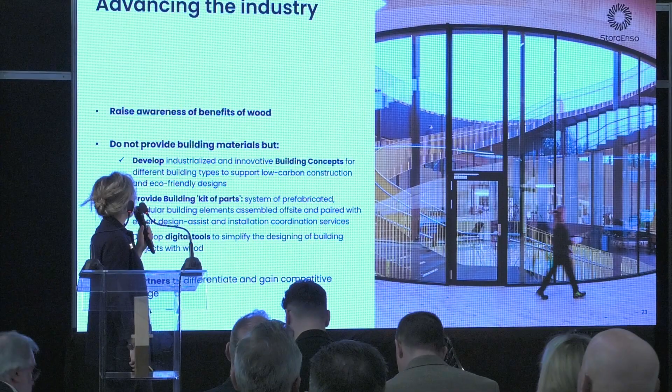So let's start from Wood Products Division. As Stora Enso, our goal is to be the leading provider of solutions for buildings in wood construction, and we want to raise the general awareness of the benefits of wood. We do not want just to sell material, but we want people to be aware of what wood construction means for the future. We do not just sell products, but we provide the building material, and we develop a building concept to give you a lot of information about how wood construction can be built.

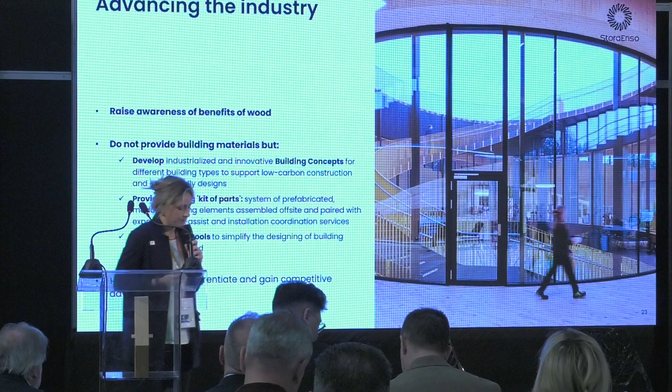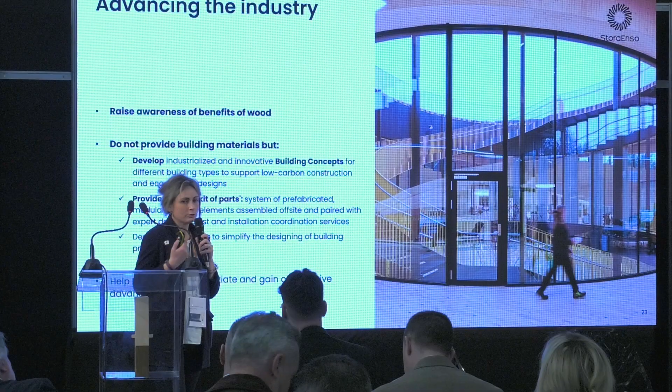We provide the building kit of parts, which I will show you later. And we develop digital tools, free, available from our website, that you can use to start designing with wood. Finally, we really want our partners to differentiate in the market, so we really would like to be close to our customers and our partners to let the market grow.

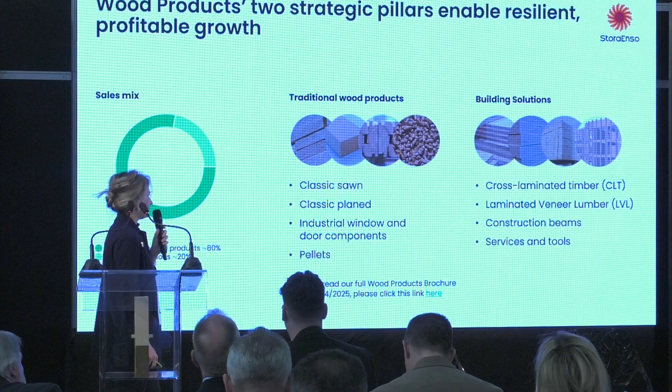In wood products at Stora Enso, we have two business lines, let's say. The biggest one is traditional wood products, so classic sawn, industrial wood, pellets, and so on. And then we have building solutions. I understand that Georgios already introduced you to the difference between classic sawn and engineered wood products. In building solutions, we deal with engineered wood products like CLT, LVL, glulam, and so on.

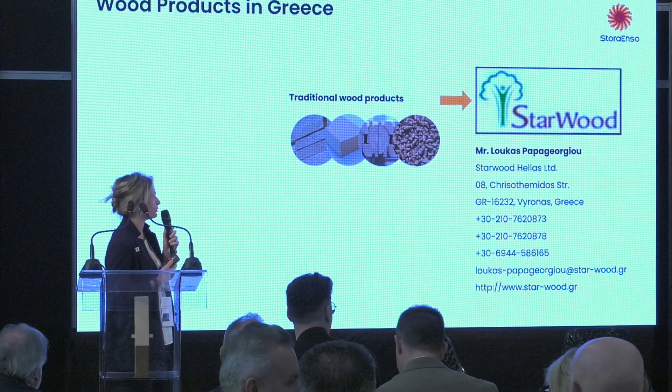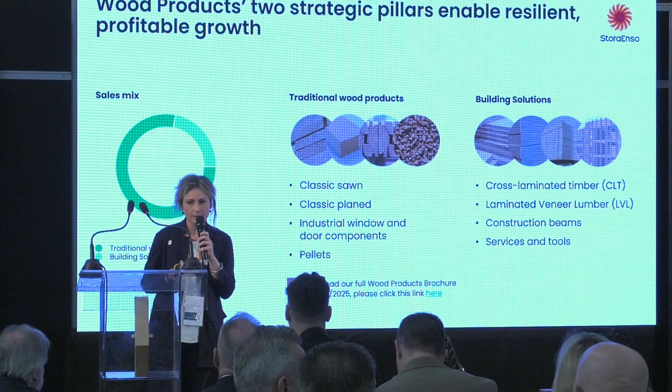When it comes to traditional wood products, in Greece we have an agent already, Starwood. I think Loukas is here, and I would like to thank Loukas for his job so far in this country. But when it comes to building solutions, we do not have an agent. We want to be directly close with our customers, and we want to have direct communication and a direct relationship with them.

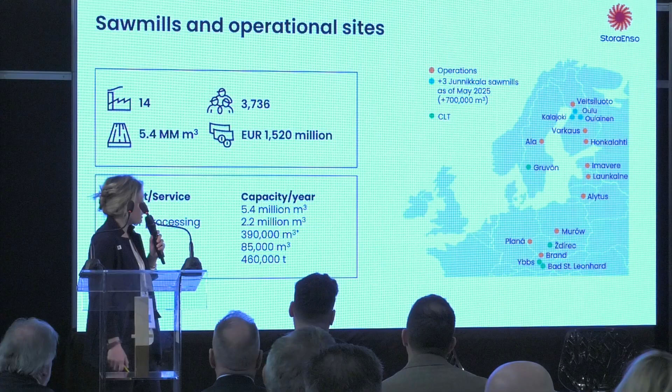Regarding our sawmills, as Bernd said, we are really big. We have 14 sawmills all around Europe, and you can see in the pictures, the green ones are the ones where we produce CLT. So if we think about Greece, the Austrian mill is the closest one from here.

I would like to introduce you to our Sylva. Sylva is our brand of our kit of parts. The name, of course, reminds us of the forest, the wood. It's a building kit of parts for prefabricated elements that can arrive at the construction site just in time. What is included in the Sylva kit?

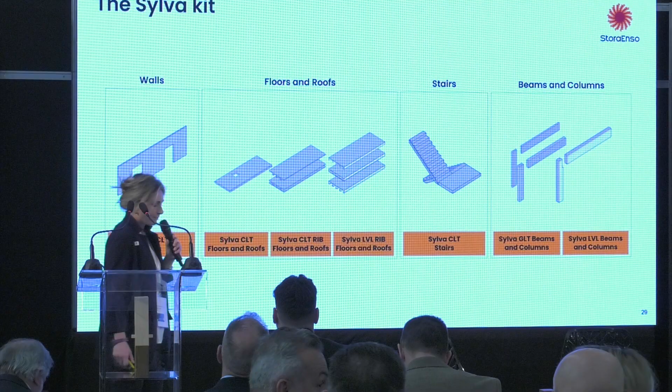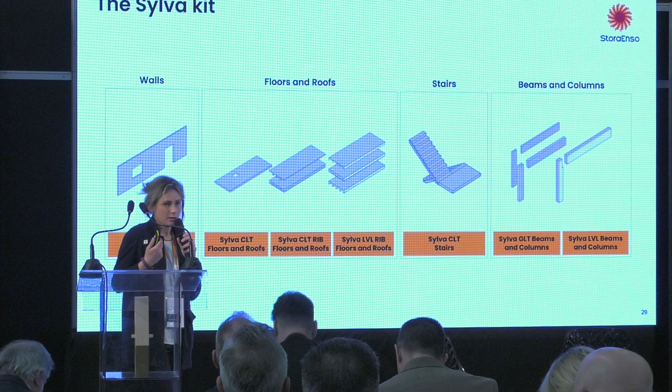We include Sylva CLT walls, so you can use a CLT panel. I will show you later what CLT is, but just to let you know, the Sylva kit includes walls, floor and roof, stairs, beams, and columns. So we can ensure you that with all these elements, you can assemble a full structure of a wood building.

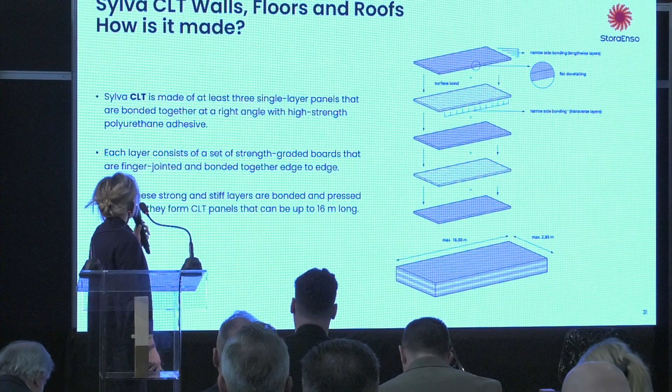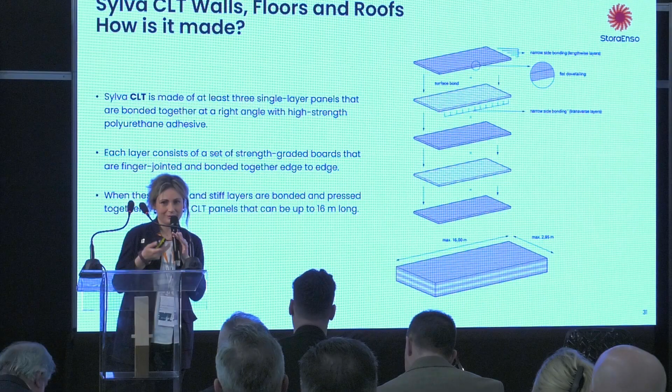But what is CLT? CLT is made of at least 3 single layer panels that are glued together, and each layer is glued with the others at 90 degrees. This means the panel has more stiffness in both directions, and this is why you can use a CLT panel as a floor and as a wall.

How is the CLT panel made? What we do in our mill: we sort and cut the boards, we finger joint them, we plane them, and we press and glue them layer by layer, creating a single layer. The single layers are then laid up on each other, pressed and sanded to create the final master panel.

I think a video is better to explain this, so let's see all the steps in this video.

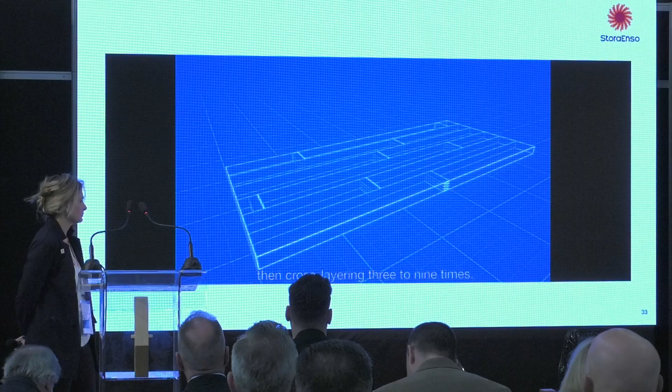Layer, then cross-layering 3 to 9 times. The layers are pressed and then sanded precisely.

Now the wooden element is cut with millimeter precision to the exact specifications required for the final build. CNC cutting lets us make exactly the right panels in the right shape and size for any building. When the exact dimensions are ready, they're packed according to the customer's installation sequence, transported in the right order, on time, to your location, allowing for smooth, efficient construction on site.

The future? It was in the forest all along.

Okay. Yeah, maybe a video is better to explain all the steps better than speaking.

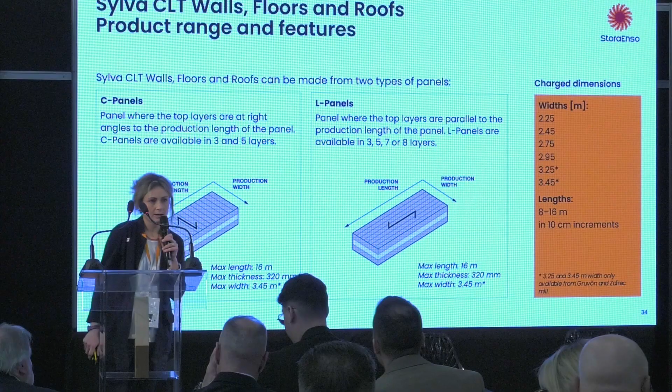Okay, so about this slide, I just want to let you know that it's really important when you design with CLT to take into consideration the production size. In the orange square, you can see our width and our length. We can produce a CLT panel from 8 to 16 meters, but it's important that you consider also the transportation limits on the route.

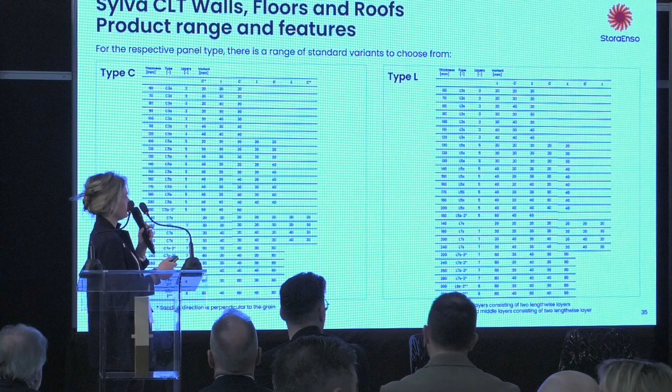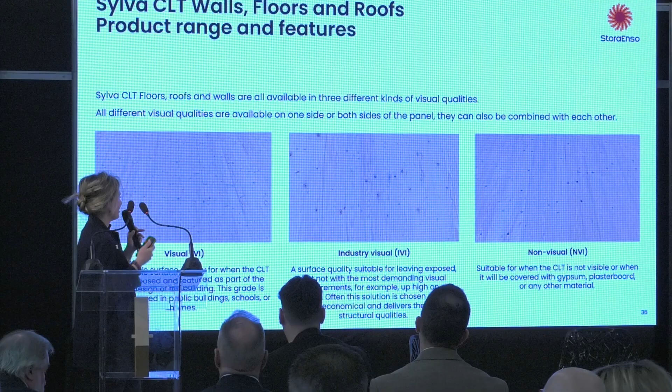We are able to produce CLT panels in 3 different visual qualities, from the best one, the visual quality, to the non-visual quality. Each board is selected according to these quality rules. And we can ensure you that the visual quality, but also the industrial quality, is really, really beautiful.

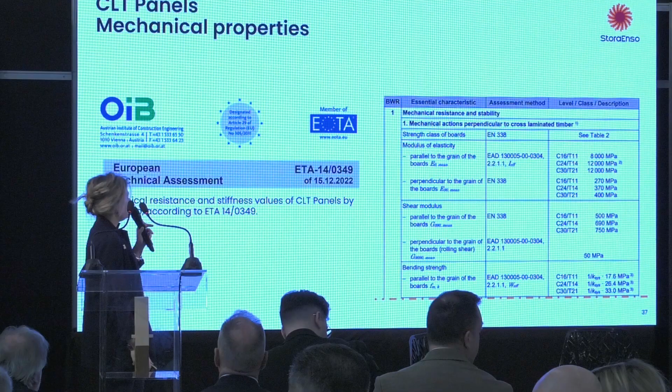Our panels, of course, can be used in construction according to our ETA. So they are CE marked based on our ETA production. And in the ETA documentation, you can find all the technical information and the technical properties.

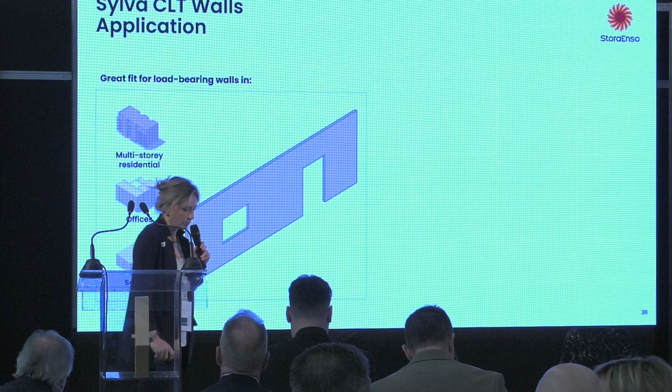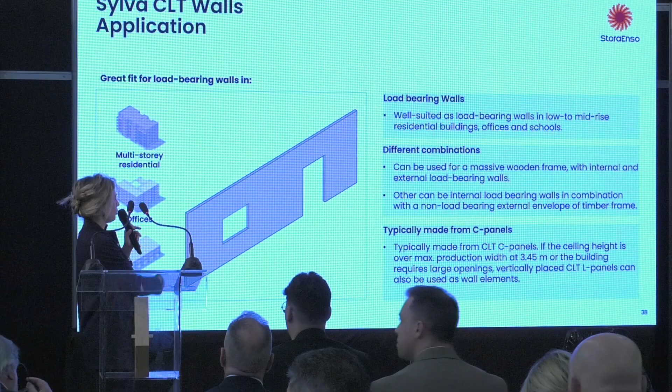Let's see now the application. So you can use a CLT wall panel for load-bearing walls, of course. So you can apply a CLT wall to the load-bearing structure of a building. And it's good for mid-rise residential buildings, offices, and schools. In this case, we are used to having the external board vertically in order to be able to follow the pressure.

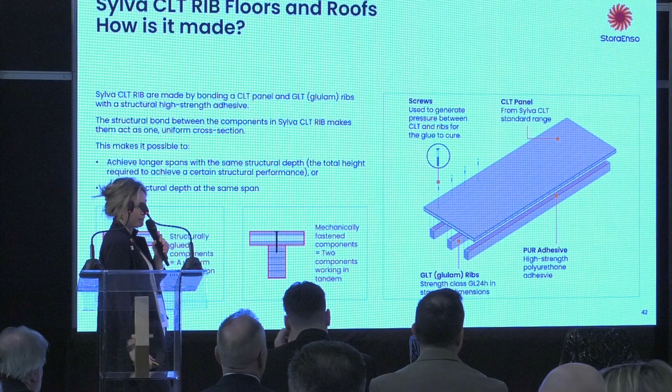You can use also the CLT panel as floor and roof elements, and it's good for spans up to 6 meters. This is, I would say, not the maximum, but the best application. If you go over 6 meters, we suggest using a rib panel element that is created from a single CLT panel plus glulam beams. And you can arrive up to 11 meters long.

But let's see why. Why we should build with CLT and with wood in general. Let's see now 7 good reasons why. Wood is a low carbon and circular solution. It means, I think all of you already thought about it, wood is the only construction material that grows naturally in the forest. We don't have to produce it. We have wood in the forest.

We just have to take care of the forest. We have to take care of the supply chain of the forest and of the wood. But no other material grows naturally. And this is really the key important message. All of you know that growing trees absorb CO2 from the atmosphere and stock carbon into the fibers of the wood. So it means that if you use CLT, you are stocking CO2 into a building, into the element. This is known as carbon sequestration.

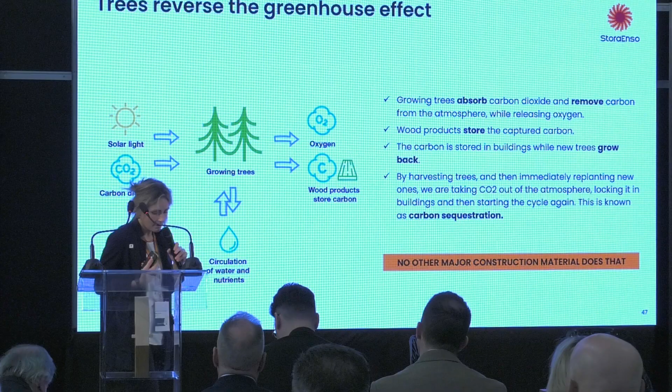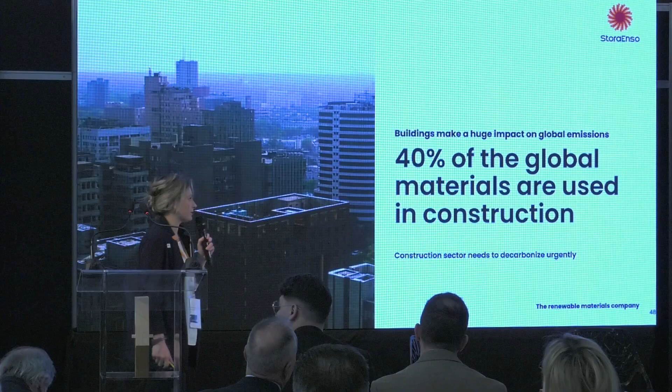And if we harvest trees and immediately plant new trees, we are ensuring a continuous removal of CO2 from the atmosphere. This is really important. No other construction material does that. Why should we think about it? Because unfortunately, we know that buildings make a huge impact on global emissions. 40% of the global materials are used in construction. So all of us are responsible for this.

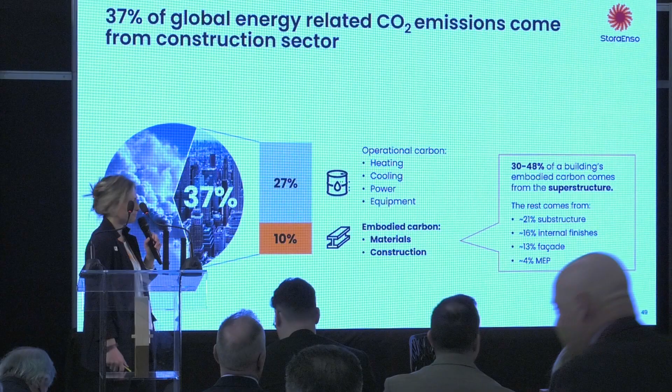And 37% of the global energy-related CO2 emissions come from the construction sector. So it means that we can work on this 10%, working on the construction material, on the embodied carbon. If we substitute wood for concrete and steel in construction, we instantly reduce emissions by 60%. And this is really a huge number, just using wood in construction instead of other materials.

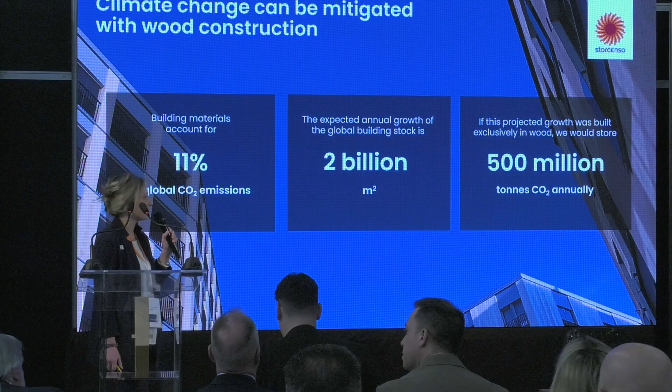Think that every cubic meter of wood can remove 1 ton of CO2. And if we think that we expect the annual growth of new buildings to be about 2 billion square meters, it means that we can avoid the emissions of 500 million tons of CO2 every year. This is really a huge number, and we should think about it every time we select the material for building.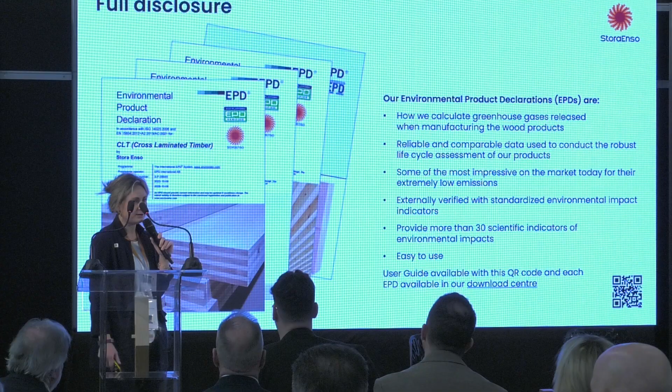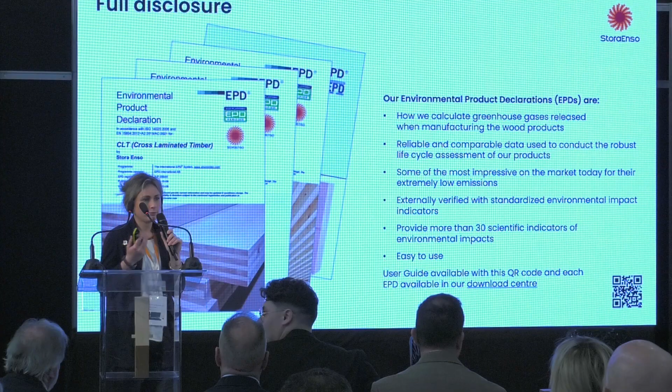In particular, our CLT is able to store 750 kilos of CO2 every cubic meter. And this is a number that you can find in our EPD. EPD is an important document. You can find it on our website. And it's the basis to create your LCA calculation of the building. If you have to do the LCA calculation, you can use our EPD. We have all the pedigree of the element.

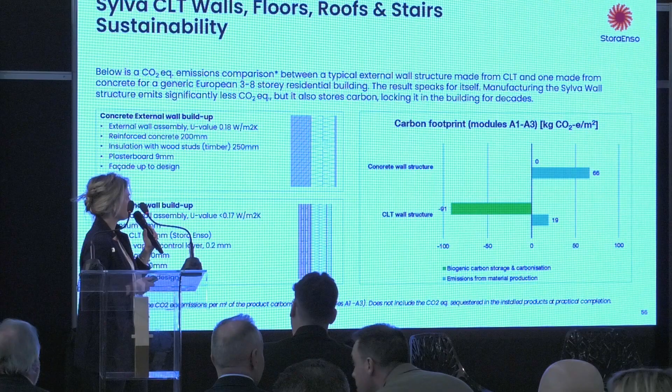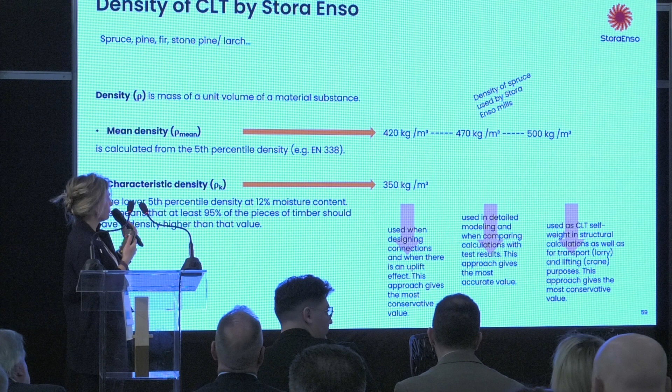Okay, I will talk just about this because it's probably one of the most important reasons. Wood is lightweight. For the more expert, I should not talk about weight, but I should talk about density. Let's consider the density of wood about 500 kilos per cubic meter. There is no comparison with other construction materials. It's 5 times lighter than concrete.

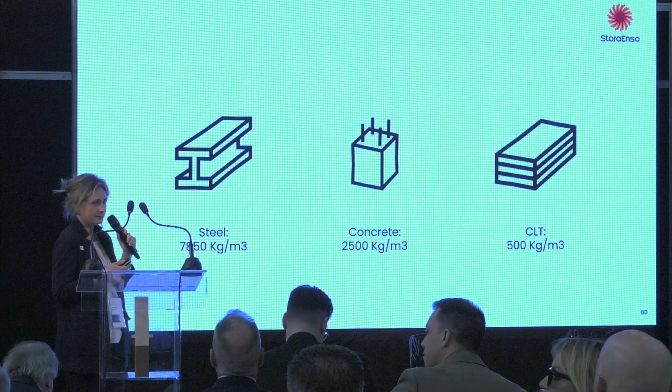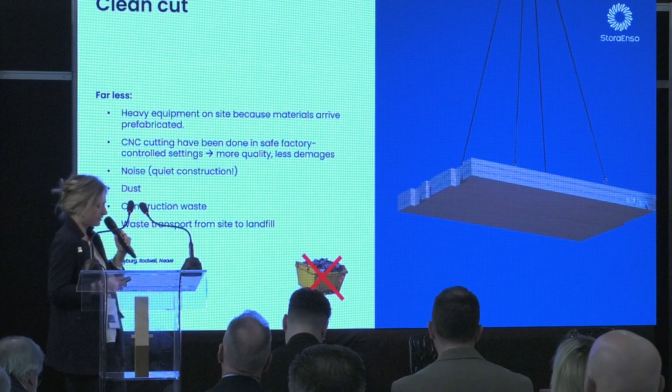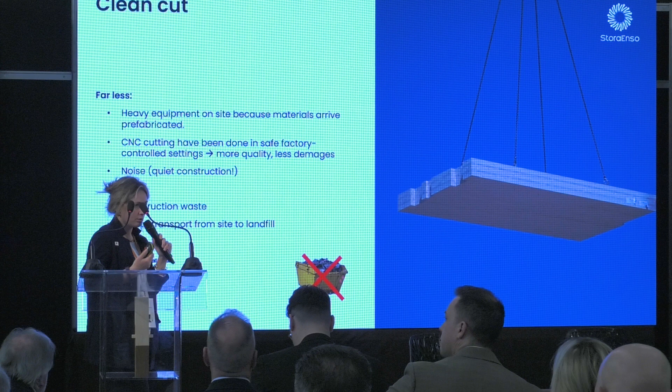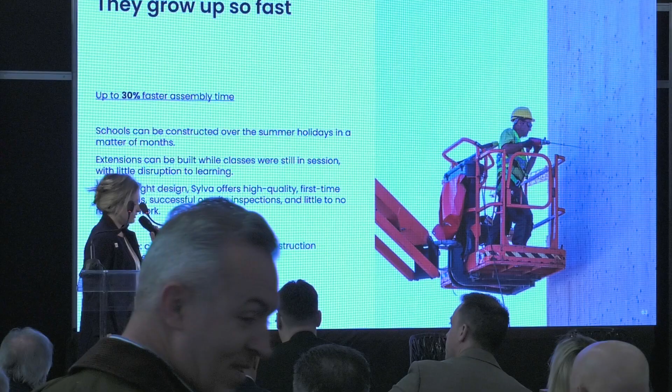What does it mean? It means that wood is perfect for prefabrication. And what does prefabrication mean? It means that you have less heavy equipment on the construction site. You have all the CNC cutting already done in our mill. You have a quiet construction, no noise. You have less dust, less construction waste, and less transportation to the landfill. Most important, you can save up to 30% of time during the construction. So the construction with wood is really quick.

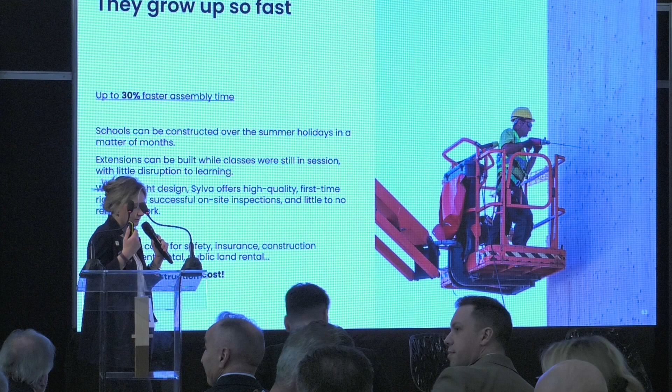And all of you know what a fast construction means. It means that at the end of the day, you can save a lot of money because you can save cost for safety, for insurance, you can save the rental for the equipment, the rental for the public space, and also for safety.

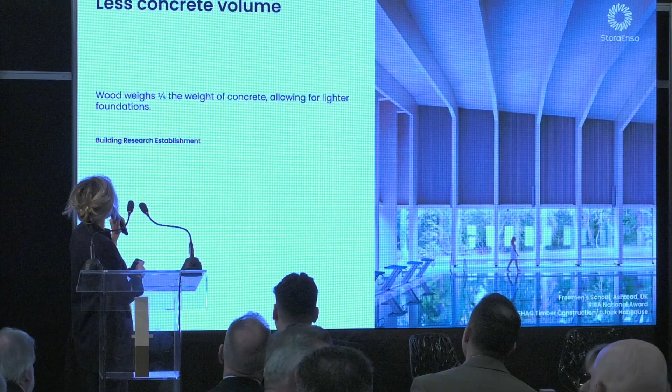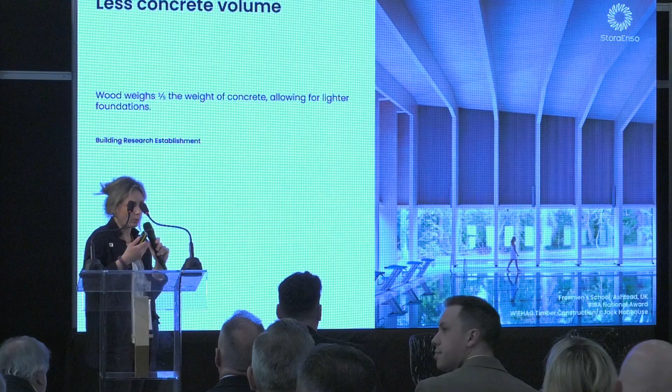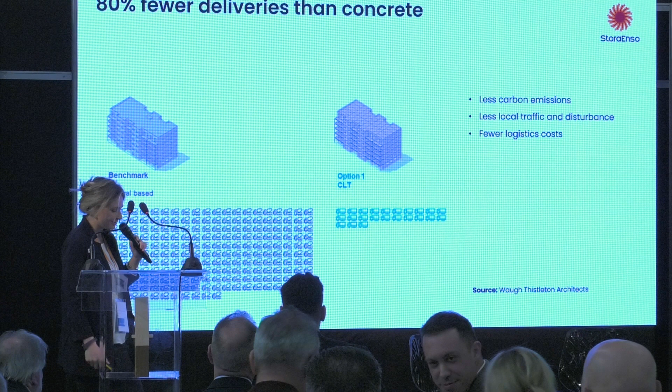You can also save a lot of volume of concrete because since wood is lighter, you don't need the heavy concrete foundation. The foundation is really small, and this is again a cost reduction. You have up to 80% fewer deliveries than concrete. You can see the comparison between the trucks. The green one is concrete, the blue one is timber, and it means less emissions, less local traffic, and fewer logistics costs. Additionally, all the transportation is already optimized to lower the emissions and the cost.

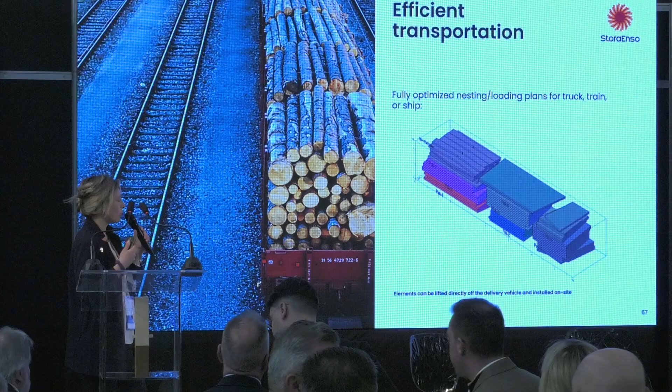Finally, the work sites are safer. Fewer people are needed to install a timber structure. So it means that you can reduce the risk of accident, you have less heavy cutting, and you can pre-install the lifting devices and also the protection membrane.

May I ask Georgios how many times? Georgios? How many? Okay. No, it's important that all of you have your space.

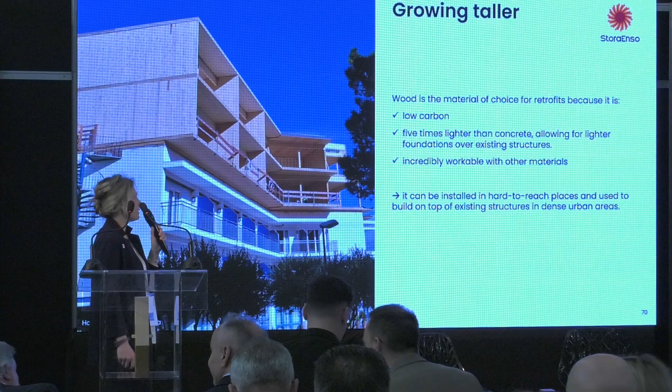Okay, then, wood is perfect also for extending the building lifespan. Again, it's the perfect choice because it's low carbon, is lighter than concrete, so it's perfect to extend the existing building.

Just a moment, I need to drink.

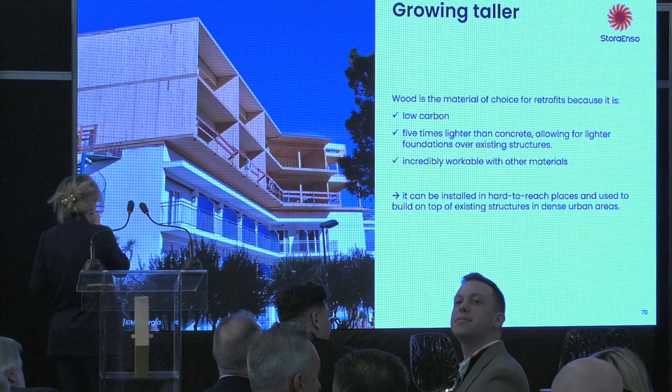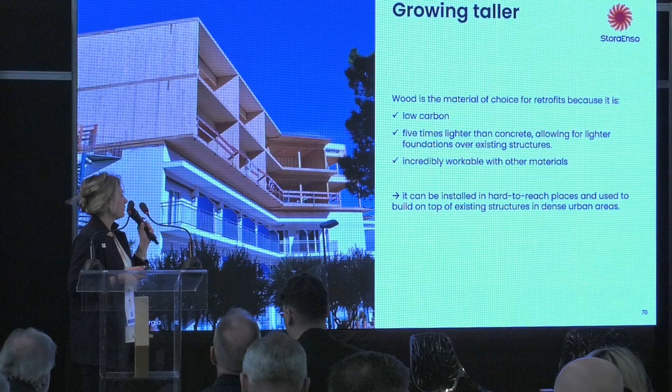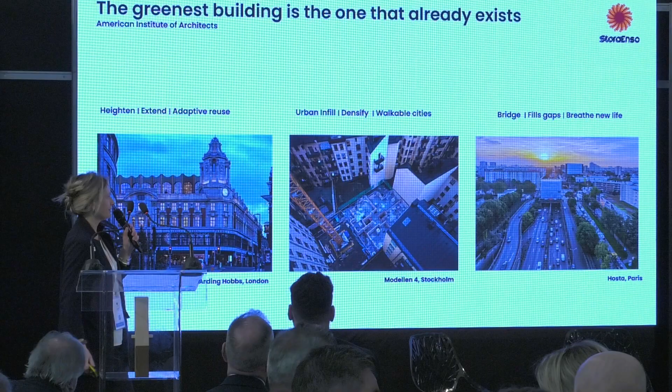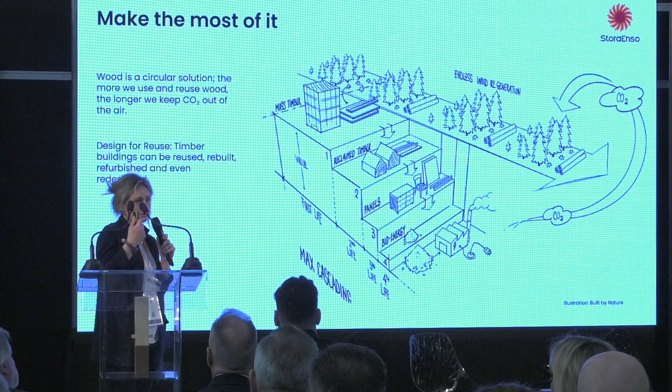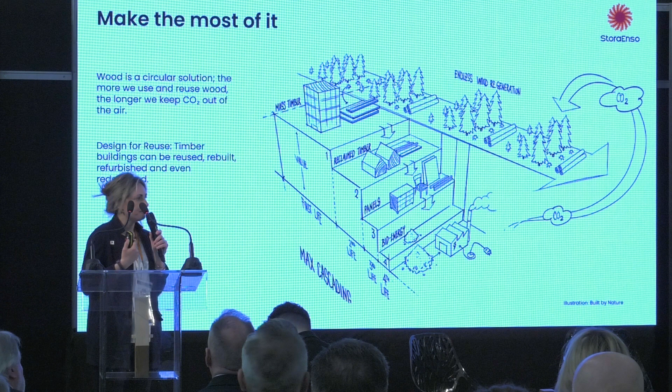This is why wood is a circular solution, because the more we use the same material, the more we keep the CO2 far away from the atmosphere. So it's good that we reuse the same element several times. We reuse the same building. We apply some retrofit assumptions on existing buildings. For example, the panels of this pavilion, here you can see a roof, but the same panel has been used in a residential building in the Czech Republic after the first stage of its life.

Then, we know now that energy is really expensive, especially at this time. So it's important to keep the bills of our house low. And this is where wood is perfect, because it's airtight and naturally thermal. You can think that the thermal conductivity of CLT is 0.12 watt per.

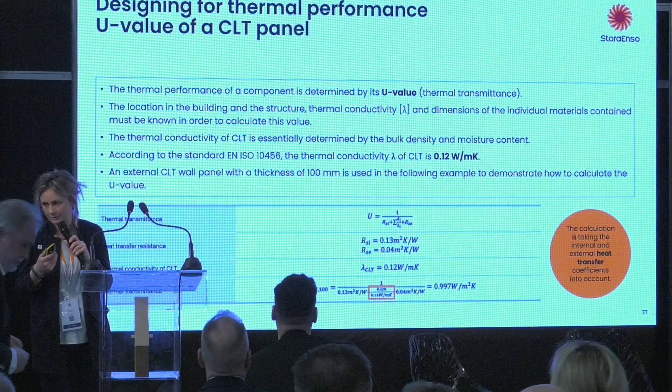I think I have done. Yes. I think I can finalize, because in any case, the time is. I will be very quick.

You can also have an economical advantage of using timber, because you have a selling proposition. This is really important for the market. Developers report higher sales, rental, and lease rates for wood buildings. If you want to sell a wood building, you will get more money. And we have to consider that the next generation is more willing to consider wood buildings.

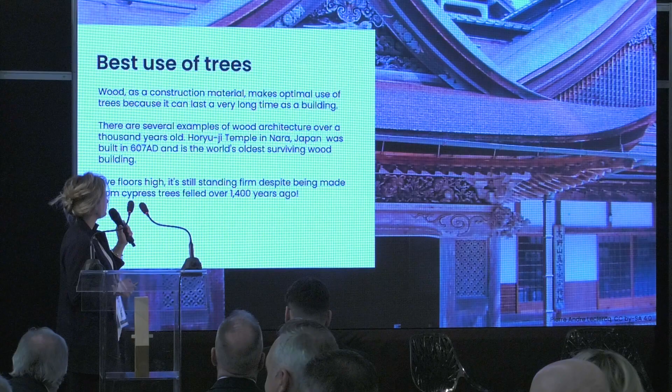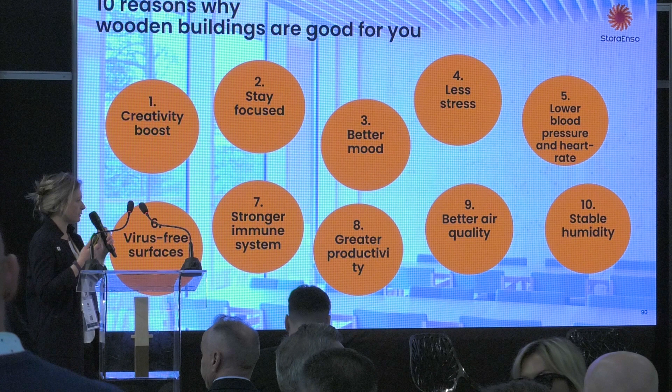At the end, I just want to say that we have 10 reasons why wood is good for you, also for well-being. You have a better mood in wood rooms, and so on. People feel better, work better, and perform better in a working space made of wood.